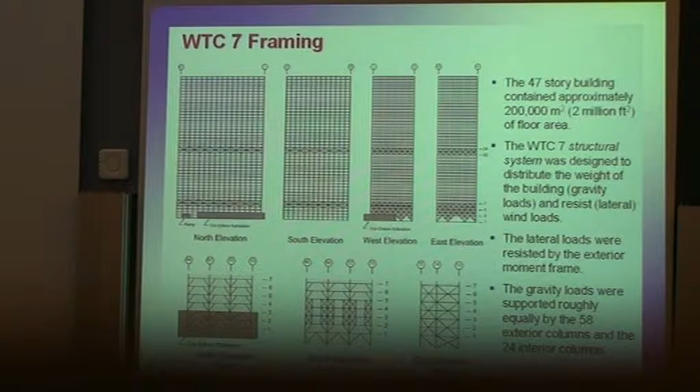The gravity loads were supported by 58 exterior columns and 24 interior columns. That is a plan view of a typical floor of the building, where you see the exterior column frames - all of them are moment resisting - and everything inside here is interior columns that were connected to the floor through gravity or shear connections.

Pay particular attention to this line of columns, column 79 in particular, followed by column 80 and column 81. You can see that the tributary area assigned to these columns is huge. The span on this side is about 52 feet. That would translate to how many meters? I forgot - maybe 17 meters, 15 to 18.

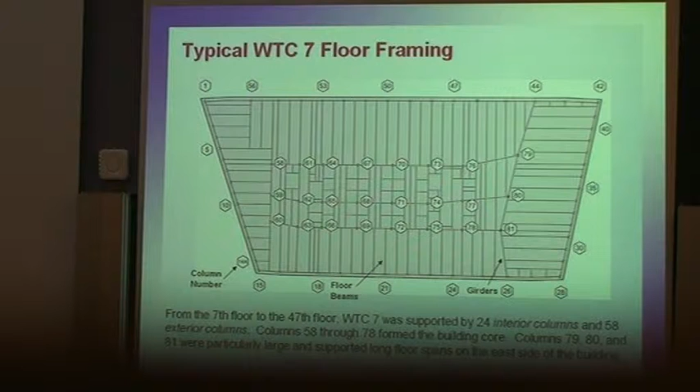I'll show later that the kink we showed at the top of the building would correspond to the location of column 79. So a lot of attention would go into that critical column.

This again was a composite floor slab, but there were no trusses and no knuckles. The composite action was created by what we call shear studs - steel elements that you put on top of the top flange of floor girders and beams. Actually, in this case, only floor beams had this; floor girders didn't have this type of shear connections.

Just for the rest of the talk, and when you read our reports: the elements connected between two columns, or resting on two columns, we call these girders. The elements that are resting on the girders, we call them beams. So always keep in mind the distinction while I'm speaking. This is a girder, this is a girder, but this is a beam. Definitely girders are more important because they can take the load and send it to the column.

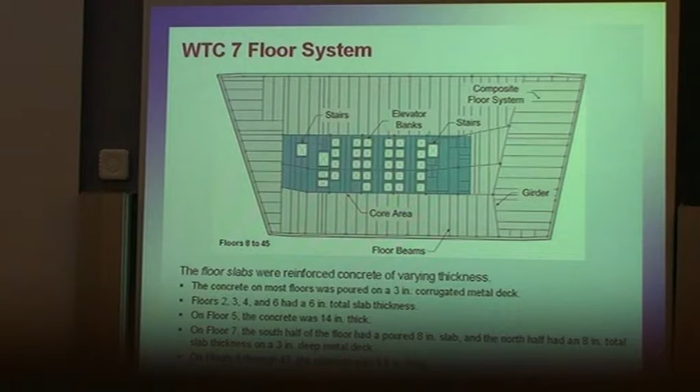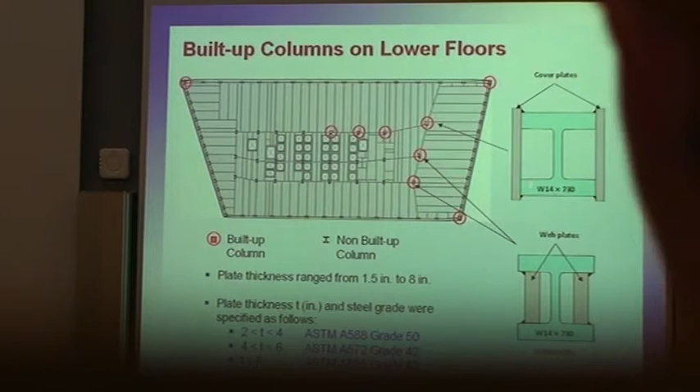Some of these columns were huge, and if we're focusing on those three columns, you can see there are built-up sections - what we call wide flange sections - and that huge section by itself was not enough, especially in the lower floors, so they added plates that were welded to the main section in order to carry the load imposed on them. These plates can have a thickness of up to 8 inches, 20 centimeters.

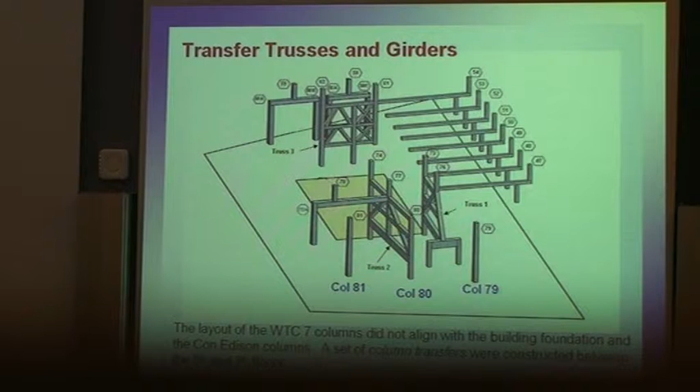These are some of the structural design features that they have to implement in order to get the load around the Con Ed power station underneath the building.

There are lots of transfer girders and lots of trusses that will take, for example, the load of this column and transfer it to this system of columns. You can see that happening in a lot of locations around the perimeter and around the core as well. The concept of transfer trusses and transfer girders was the subject of intense speculation from the day of the collapse - a lot of people thought the collapse would definitely have to start somewhere in this mechanism, but that's not what our study is showing.

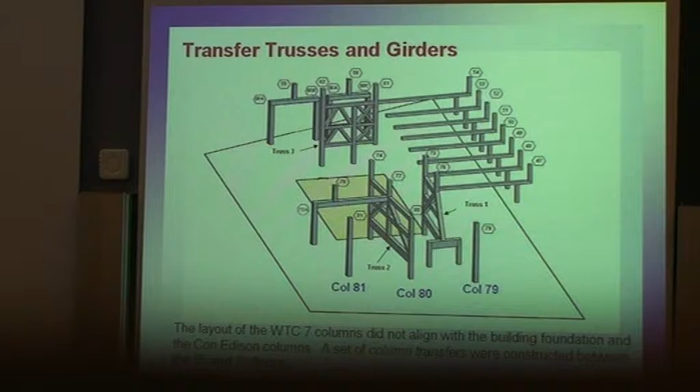I'm not sure why. Just the roof layout - you can see this is the east penthouse that we showed early on, where the kink occurred somewhere in the middle, and this is the rest of the structure on top of the roof.

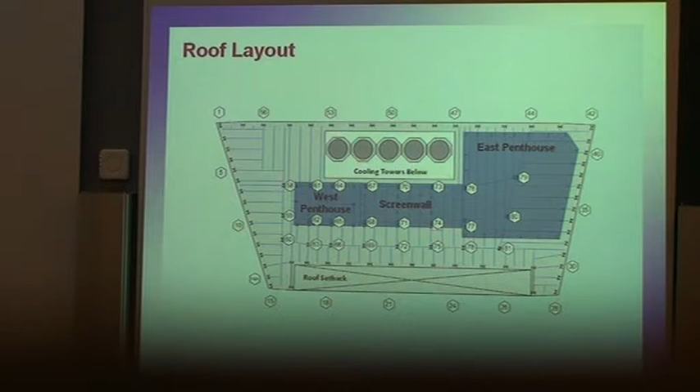Analysis issues: in a way there were some similarities between the towers investigation and the World Trade Center 7 investigation, mainly because we are dealing again with fire and how the fire spread. So we had to run analysis of fire growth and spread, and we had to go through the thermal analysis and analysis of structural response to fire.

I got a question after the previous session - did we write all these commercial software, or did we write our own software? Basically FDS is a software developed and maintained by NIST. You can download it from our website for free, and it's being used to simulate fire growth. We used ANSYS for this type of modeling, for the thermal analysis, and for the structural analysis to fire.

This model was a 16-story model of the building that accounted for the thermal loading due to the temperatures that were computed, and we ran the analysis all the way up to the initiation of collapse. Then the progression of collapse was conducted using a model in LS-DYNA that showed how, after the initial event occurs, as I'll explain later, things would go all the way to collapse.

But between these, we didn't just use commercially available software - we wrote our own programs and scripts in order to take the outcome of one analysis and use it as an input for the next, for different mesh sizes and for different durations, as I mentioned early on.

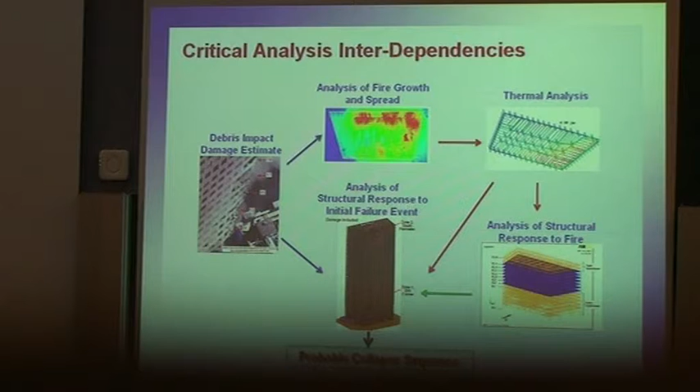Fire was observed, and I'll show some pictures showing that's the north facade of World Trade Center 7. This just shows wherever windows were broken or fire was noticed in some of those windows around the perimeter of the building. We didn't have quite as much photos of the fires as we had in the towers, because the towers, we had thousands of photographs.

Here, after the collapse of the towers, lots of photographers who were around the building had already left by then. But still, we got enough pictures that would help us characterize the fire growth and the fire movement around the building throughout the rest of the day.

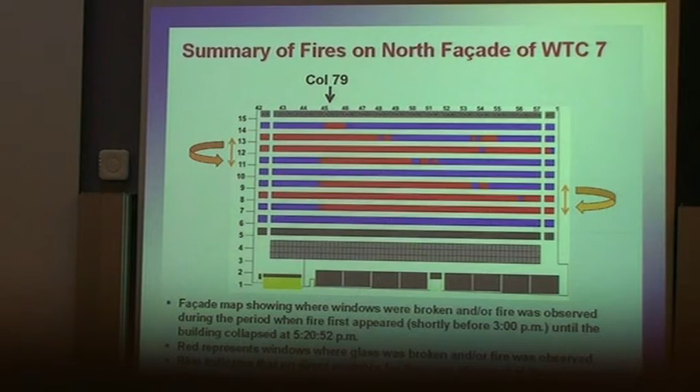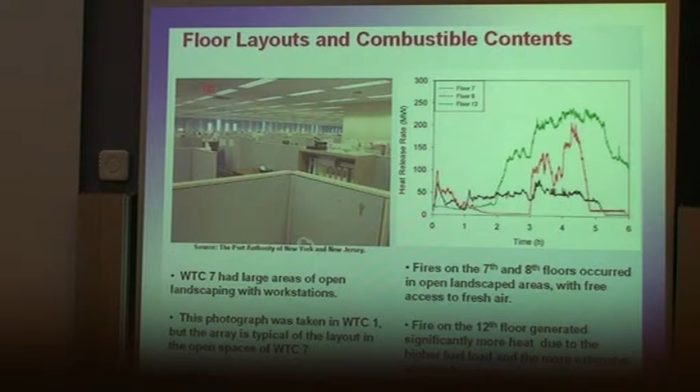The fire started actually on 10 floors, as we saw in lots of pictures. But fires moved in different ways. Some fires moved east and then north. Some fires moved north and then east. But both of them, around the time of collapse, were concentrated in the northeast corner here.

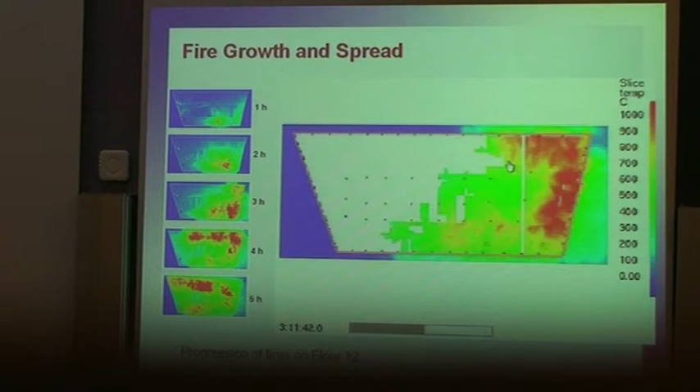And it's not just a simulation that showed that, but as I mentioned early on in the previous presentation, validation was a big issue for us. So we confirmed that behavior with lots of photographs that show for 6 floors, 7 to 9 and 11 to 13, that fires that started here got here somehow, either through this path or through this path. And for these 6 floors around the time of collapse, fire was concentrated here.

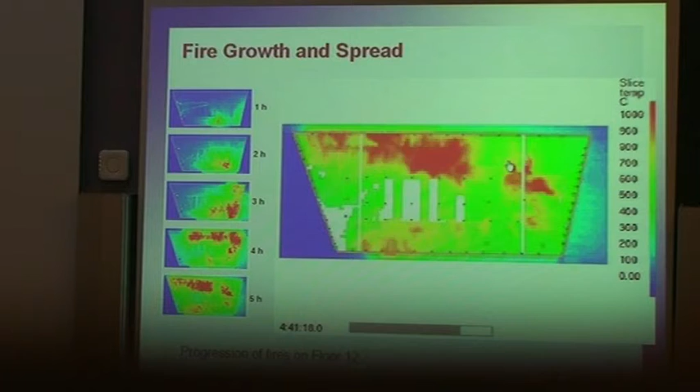We noticed that the fire in the core, this is the core area, it's not affected by fire much. The reason is, in the core, there's much less combustible load. The core is mainly staircases, elevators, and corridors. There is not much desks and chairs and seats and stuff. So that's why generally the core area would be colder than the rest of the building.

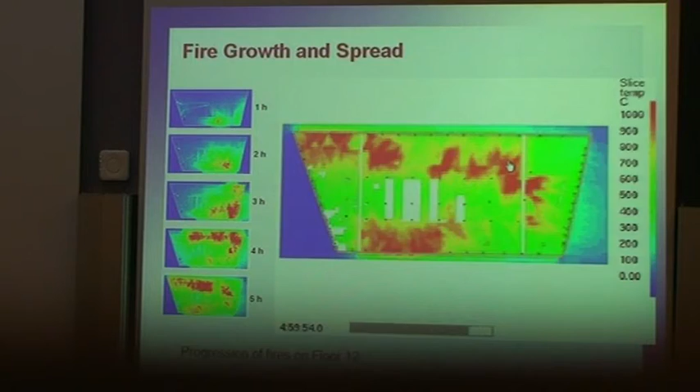So that just summarizes what I was saying. There were fires on 10 floors, but ultimately some of them just burned out throughout the day. But at the time of collapse, the sustained fire, the consistent fires were observed in floors 7 through 9 and 11 through 13. And that was validated by pictures.

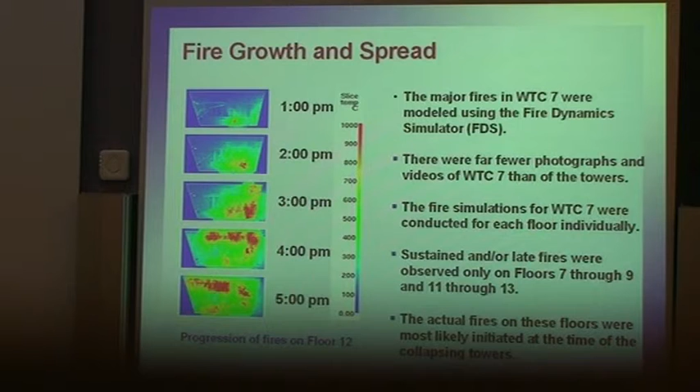Similar to what we have done, we took these heat release rates and gas temperatures coming out of FDS, and this is a thermal model of a typical floor. This is floor 13, and you see the evolution of temperature at 3.5 hours from the start. Generally, the start is considered around noon time, but that is subject to some uncertainty.

But you can see here the fire is on the southeast corner. It's moving further north, and at about 4:30, or 4.5 hours from the start of the simulation, the fire is concentrated in this northeast corner. This shows the temperatures on the steel framing, and this shows the temperature on the concrete slab.

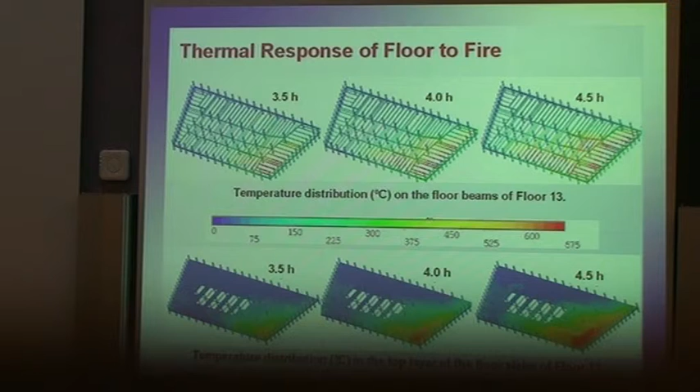This shows some of the results of the thermal analysis, how you can capture the temperatures along a beam and along even the connections. While we do not need to model the connection in detail for this type of analysis, we definitely need to do that for the structural analysis. But for the thermal analysis, we didn't need to do that, but it showed that the location of the connection would get a temperature between the temperature of the beam, the temperature of the girder, and the temperature of the column.

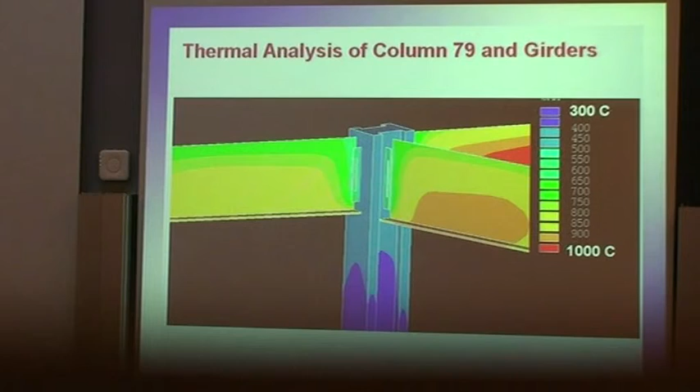Two-phase structural analysis modeling for this investigation: a 16-story model. I said that the fires were mainly from 7 to 9 and 11 to 13. So we modeled the structure from floor 0 all the way up to the 16th floor to give us enough boundary conditions above and below the affected floors.

And these models accounted for the heating, structural failures, thermal response to collapse initiation, and the time step was seconds to minutes here.